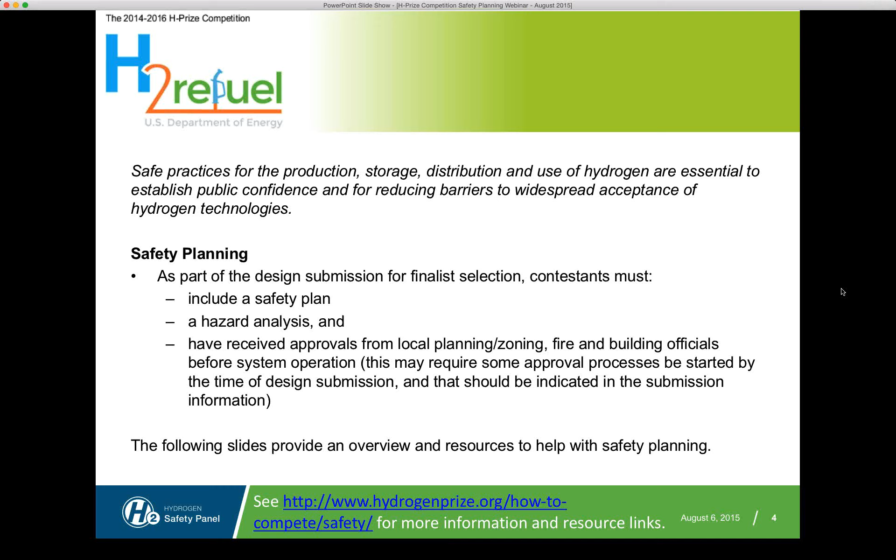PNNL has a core capability in hydrogen safety to meet the DOE Fuel Cell Technologies Office goals and needs. The capability is implemented through the resources below, of which one is the Hydrogen Safety Panel, and we'll go into a little bit more detail on that.

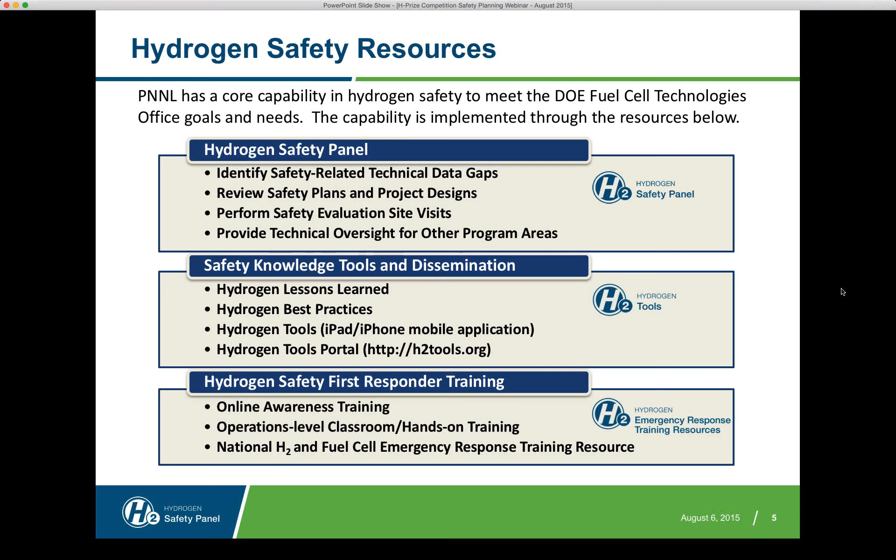Some safety knowledge tools for helping those that are in the midst of designing or deploying some of these systems, and first responder training resources. We'll talk about those at the end of the presentation.

Covering the Hydrogen Safety Panel: the panel is a team of highly experienced individuals created to address concerns about hydrogen as a safe and sustainable energy carrier. We function in a variety of areas, and our objectives are identifying and addressing safety-related technical gaps, making sure relevant issues and best practices that affect safe operation are brought to design, construction, and operation personnel, and then working with various projects and those involved in deployment activities to make sure that they understand the issues and that they make safety a priority for that activity as well.

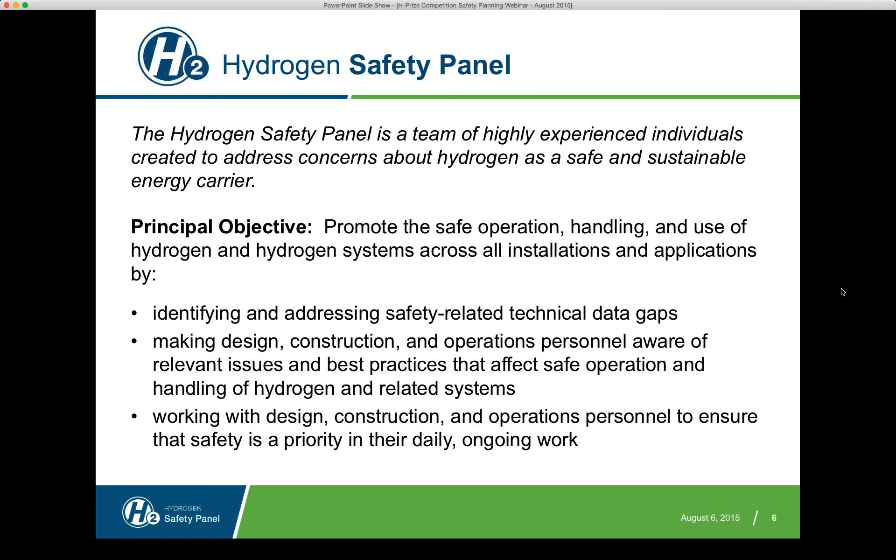The panel contributes to its objectives by participating in safety reviews. That includes safety plans as well as other design reviews, sharing safety knowledge, presenting and recognizing safety as a priority, participating in incident investigations, and really working with stakeholders and other interested parties to become more familiar with issues and safety resources and safety practices.

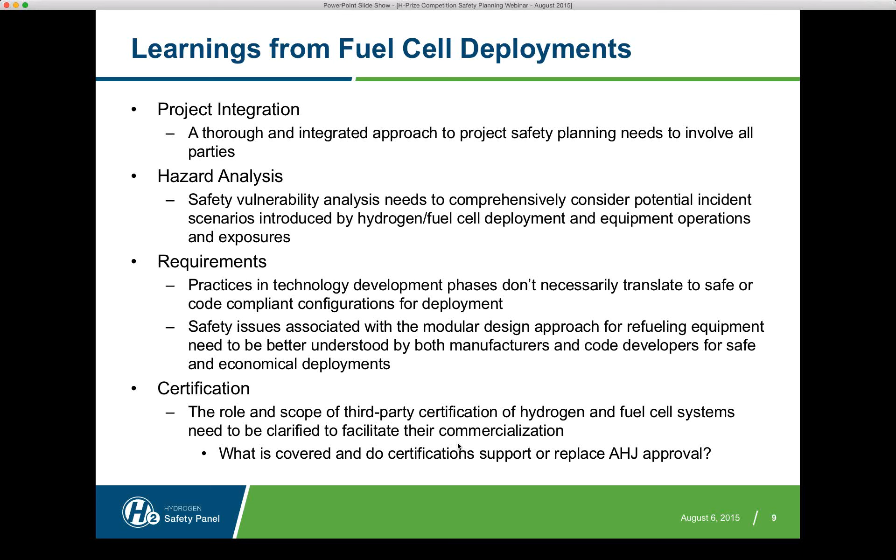So the need for safety planning, and this is really the important part we're jumping into here. I want to stress, while the competition, those providing or inputting into the competition are required to have a safety plan, it's not just about writing a document. We've seen a lot in the panel over the years, and sometimes the effort is just to get a piece of paper put out so that they can check a checkbox.

That paper is a necessary part, but the real goal here is to integrate safety planning across the entire activity, not just for what's written on paper, but the practices and the thoughts of what happens at the beginning, midpoint, endpoint, use, maintenance, all those. It's really important to consider safety. It's essential to protect people from injury, and it's also necessary to minimize damage to facilities.

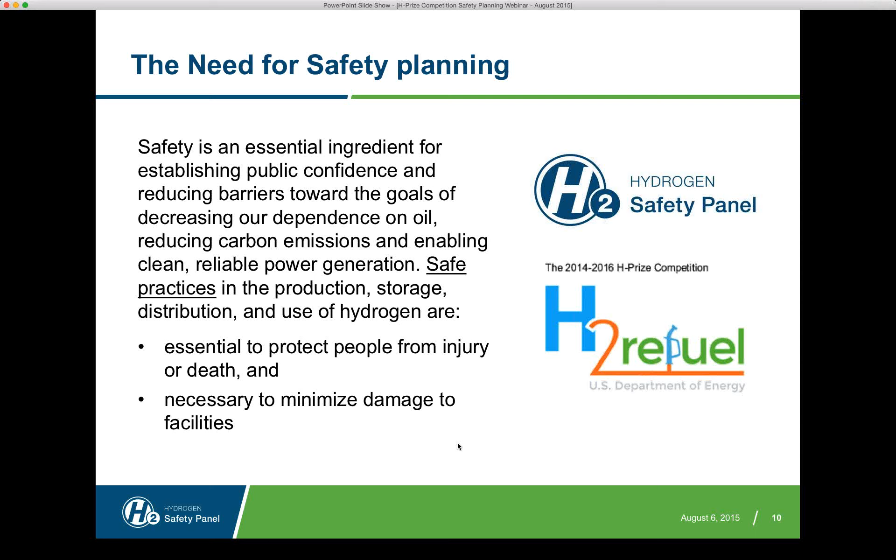Primary goals of safety planning: identify the hazards, evaluate the risks by considering likelihood and the severity consequence of an incident, and then minimize the risks associated with the project to acceptable levels. Various hazard analysis and risk assessment techniques are typically used to do that. Safety planning should be an integral part of the design and operations, not an afterthought or a final hurdle to be overcome before a system can become operational.

So we put a lot of these points down as the panel, the hydrogen safety panel, will be reviewing the submittals, and we're looking to see that safety isn't just an afterthought or isn't just a checkbox, that it really is given thought and consideration for how to be implemented across.

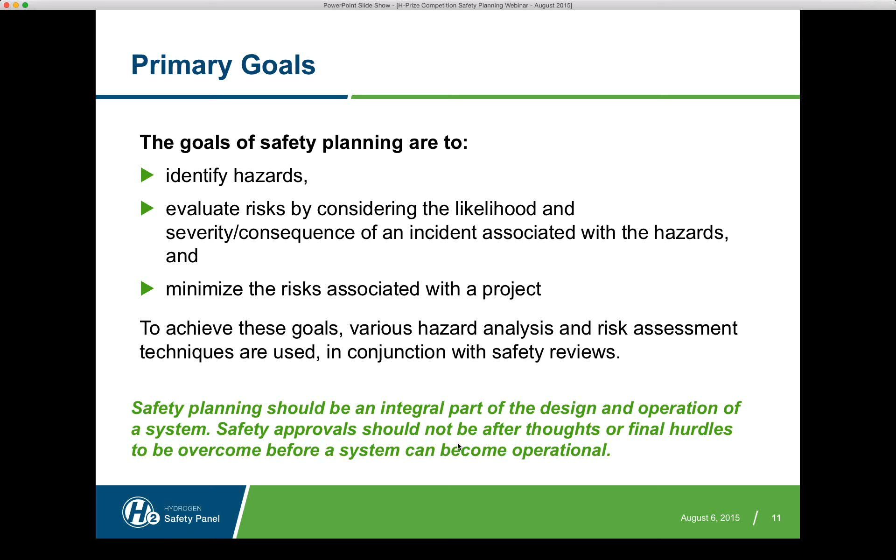Some guidance for effective safety plans. The project safety planning process is meant to help identify and avoid hydrogen-related incidents and generate a good safety plan. The key here is that a safety plan should use a graded approach based on the level of risk and complexity, and it needs to cover all the experimental and operational work, with particular emphasis on aspects involving hydrogen and hazardous materials.

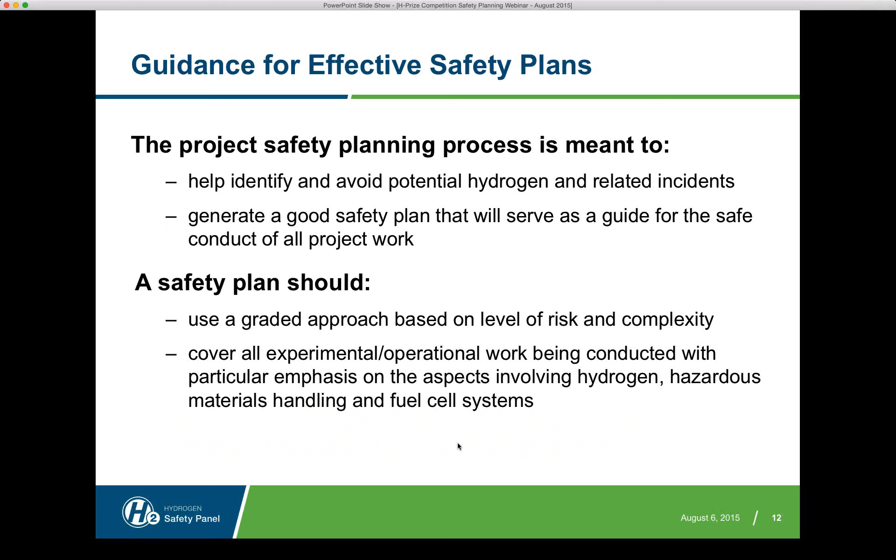The key critical point is to understand what the hazards and risks are and to mitigate those accordingly. In general, a good safety plan identifies primary failure modes and then secondary failure modes that may result from other failures. An attempt is made to identify all conceivable failures, from catastrophic failures to benign collateral failures. Identification and discussion of perceived benign failures may lead to identification of more serious potential failures. So in that hazard analysis process, whether you use HAZOP or something more like a what-if, it's really important to look at all the potential conditions, and then as you move through that process, eliminate those that are of lesser risk overall.

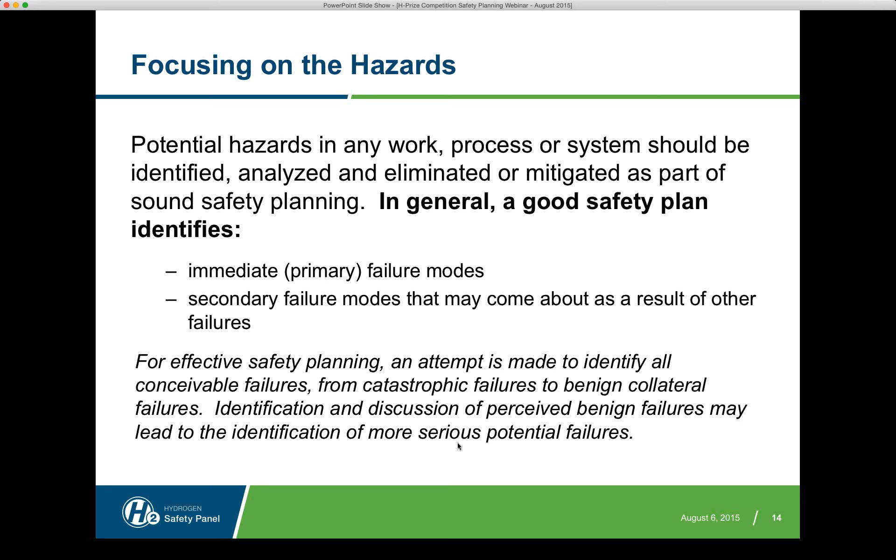A little bit of information: two questions that really need to be addressed in the ISV are what hazard associated with the project is most likely to occur, and what hazard has the greatest potential for consequence, or the worst consequence, I should say.

In providing a hazard analysis and discussion of that in the safety plan, we really want some information, like what method was used for the identification of safety vulnerabilities, who led and stewarded the process, what the significant events were, and what the safety critical equipment is, and whether vulnerabilities and risks are identified adequately, that sort of thing.

This tends to be a really big point of comments that we've made to projects, and probably one of the leading weaknesses in safety plans has been in this area, that it wasn't clear that all the hazards and risks were identified and mitigated properly. There was either inadequate discussion in the safety plan, or it seemed like the safety plan didn't address all the issues. This is an area you really need to focus on, as it's really the center of the safety plan.

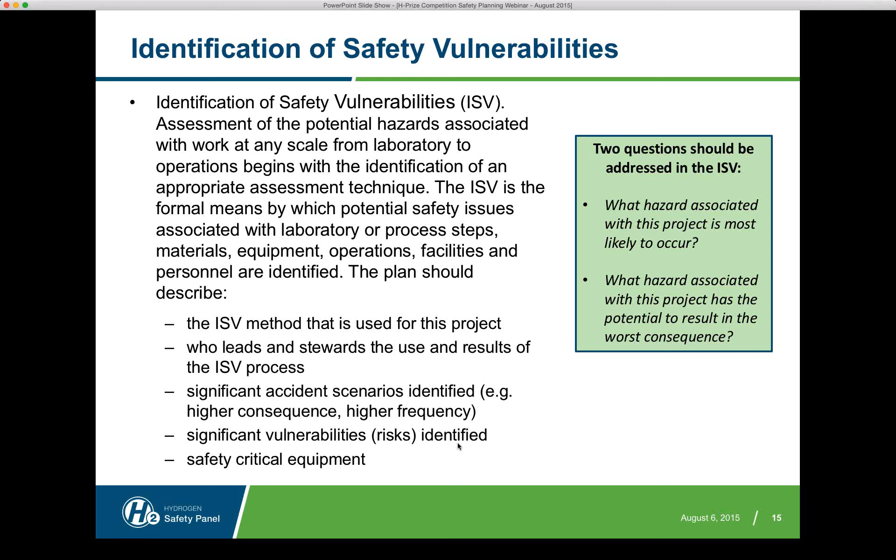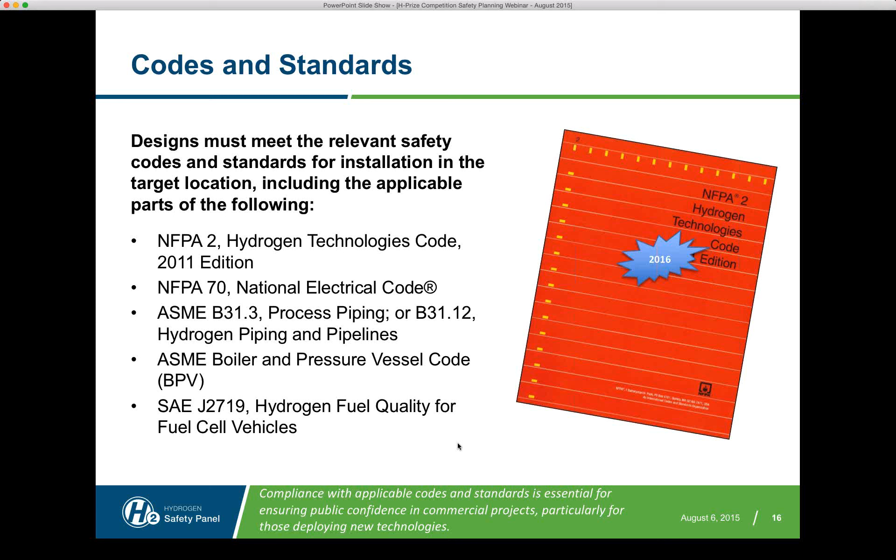Some other codes: NFPA 70, the ASME B31.3 or B31.12 would be helpful, leaning more towards 31.12 for some of this activity. The boiler and pressure vessel code, and J2719 for fuel quality. Some others that may apply depending on the type of equipment you end up providing: J2601 and J2601-2, as well as the ISO standard.

Additional codes and standards could apply depending on what you're doing and where you're doing it. The key here is that your location is going to have some impact on what codes and standards are also required locally. So some discussion in the safety plan as to what codes and standards you're following and required to follow for local requirements would be good to have. Submissions that deviate from base codes and standards need to provide detailed information on what is different and how equivalent safety is provided. The codes themselves, for the most part—NFPA 2, for example—have standard language that there are acceptable alternate means and methods if those alternate means and methods can be demonstrated as safe and are approved by the local authority having jurisdiction.

So it would be important to understand where you're deviating off the codes and the requirements, and that you have a good technical basis for that, and that you've run that technical basis back through whatever code official you have and gotten their consent on that as well.

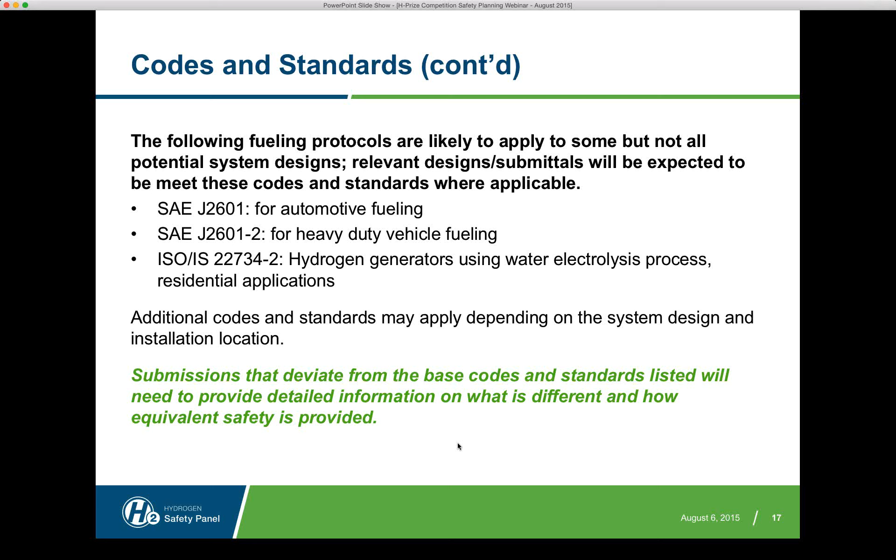So some relevant questions. Do you know who your local code official or AHJ is? And to what degree have they been involved in the design and installation of the equipment for the project? So in this case, for the submittal, it would be more the design than the installation. You may be discussing how they'll be involved in the installation as well, though. Was there any special permitting or certification that either was or is required? Has a third party review or certification of any of the components, subsystems, products, et cetera, been considered and performed?

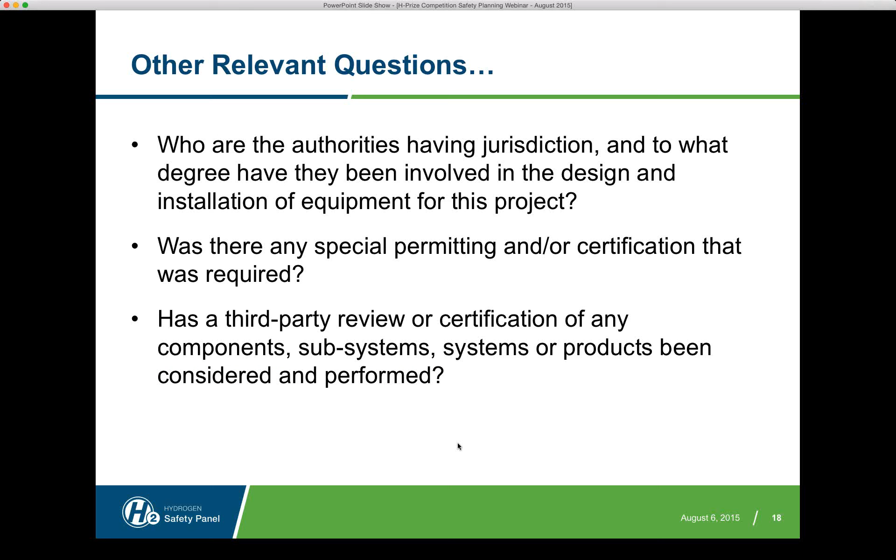Some additional documentation is required in order for the hydrogen safety panel to really understand what it is you're doing and have a good feel for the safety provided here. Things like process flow diagrams, a preliminary design or functional description for components in the systems. We already talked about the codes and standards compliance discussion. I'll take this one step further though and say compliance discussion is a little more than just saying, we'll apply this. It's really saying, what are the specific codes and how you intend to meet those, or what you intend to do where you can't meet those and that sort of thing.

Depending on what phase you are in designs and what we see for the documentation, codes and standards compliance can be a little more detailed and be beneficial for everyone involved. Most designs at a larger level go through some of this to understand, whether it be NFPA 70, some of the other standards, the boiler and pressure, the ASME standards, what are the requirements and how have we met those? Layout of the system and considering things like required separation distances, vent system considerations, electrical classification, ignition source control, ventilation requirements for enclosed spaces, that sort of thing. All that would be very beneficial and really is necessary for some of the safety planning documentation.

Well, while you're here, Nick, it might be a really good idea to talk about whether or not confidential or proprietary information can or should be included in this set of documents. Yes. Thanks, Don. That's a really great point. So if at all possible, we would rather not review anything that's confidential. Obviously, it puts a burden on the entire process to make sure there's some NDA agreements set up. If it's necessary for purpose of providing documentation, ensuring that we all understand the safety planning and that sort of thing, I would suggest that it be discussed with the Golden Office, and we work through some sort of an agreement on how to do that.

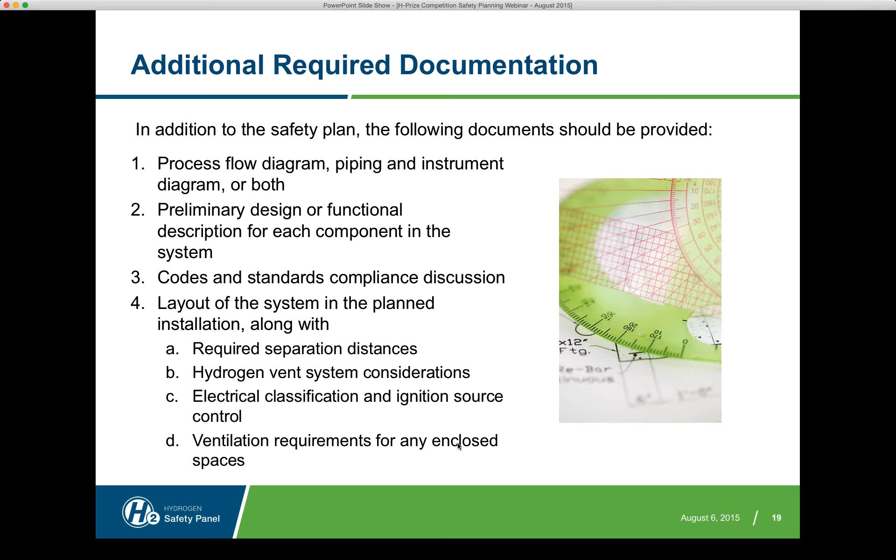Okay, I'm going to jump into safety resources now. These are resources that could be helping you with safety planning and some of the safety plan writing activities. I'll start out by talking about the Hydrogen Tools portal. This is a new website that has been brought online just this summer, and really it was meant to organize a lot of different tools into one location and make those tools much more interactive and allow much better tapping of those tools to help you in safety and safety planning. So it's a centralized location.

It's focused content. So we really considered what the user groups would be for this kind of content, and that includes things like code officials, project proponents like yourselves, first responders, research and developers, operations and maintenance folks, that sort of thing. And so the content has been tagged accordingly, and workspaces have been set up to help those specific groups navigate and communicate and do that sort of thing.

It's set up with a responsive design, so the site is very usable on the desktop all the way down to the phone. And we've really been working to establish some trusted communities. So those have all been set up. They haven't been very populated yet because we're just getting off the ground. But what it would allow is some of these user groups to ask questions, and hopefully those that have similar experience could share some answers and really help where people may not have a lot of experience.

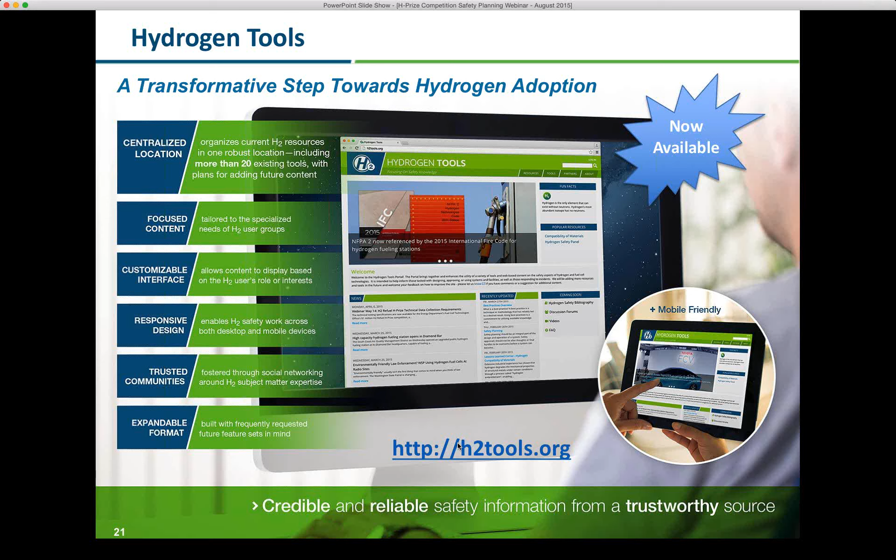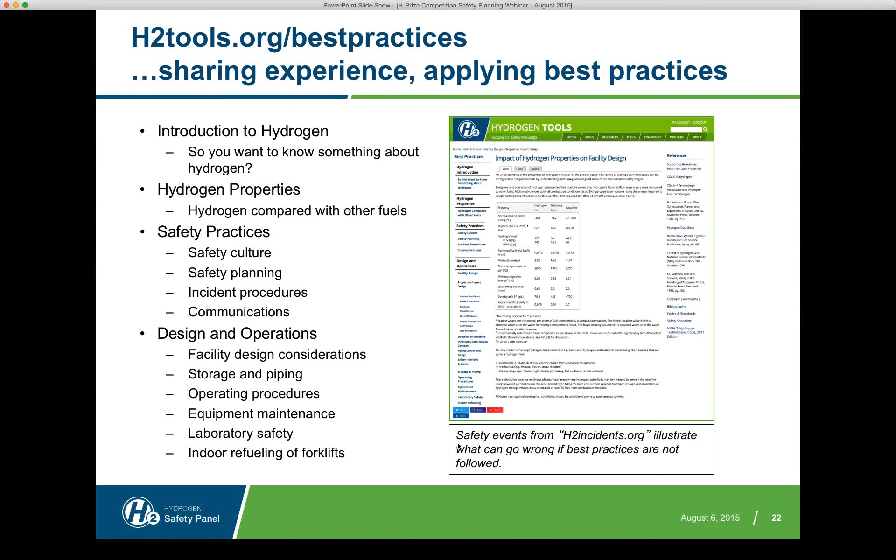So some of the information would be discussing some of the gaseous hydrogen properties. So if this is all old stuff, just bear with me for a second, but hydrogen has a flammable range of 4 to 75%. It's very light, will typically rise, 14 times lighter than air. It diffuses through material not normally considered porous. So the molecule is so small that it can really move through different types of material, and we'll talk a little bit about compatibility later on.

In a stoichiometric concentration, it requires only a very small amount of energy for ignition. 0.02 millijoules, there you see, is extremely small. Burns with a pale, almost invisible flame. There are some resources available on the portal that can show you some videos of that sort of thing and get a better feel for how it looks daytime and nighttime. And hydrogen certainly can embrittle some metals. You see in the tables on the right comparing the ignition energy versus some other more common fuels, as well as the gas to air volume ratio for flammable range.

One important point on the top bar chart there is that while hydrogen has a very large range, 4 to 75%, typically in the 4 to 6 to 4 to 8% range, it doesn't burn very well, and so it really doesn't start becoming a significant issue till you get in the 6 to 8% range and move up from there. So the lower number is actually higher in some respects. The danger point is a little higher than some of the other fuels.

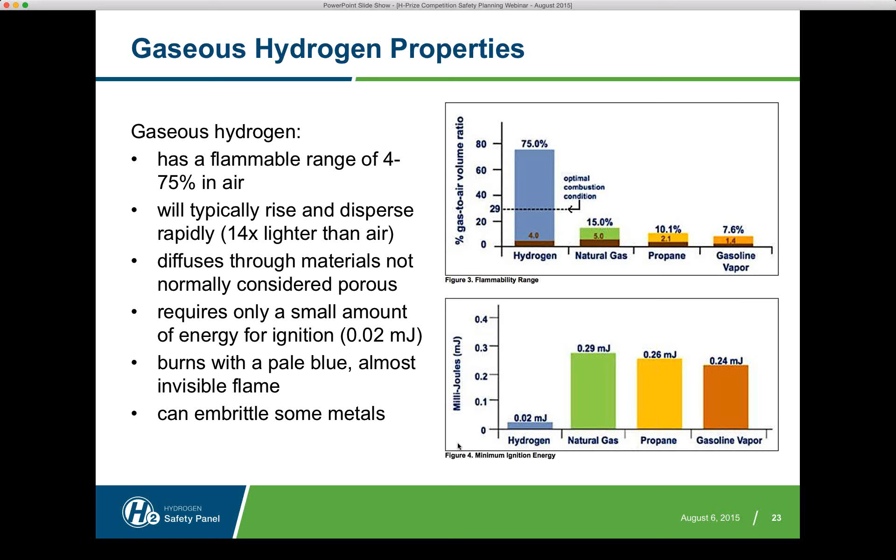Hydrogen properties, a comparison to some of the other fuels. Probably some of the best here is the odor. It's odorless, whereas natural gas you're going to smell it, and obviously you do with gasoline as well. Energy by weight is very high, but energy by volume is much less. So you can see some of the differences compared to gasoline.

For those of you new, one of the advantages of hydrogen in a vehicle is while it has to be stored at high pressure, if there is a leak or an event in which a relief device opens, the gas moves quickly away, where gasoline would typically pool and be there should an ignition source come along to cause a problem.

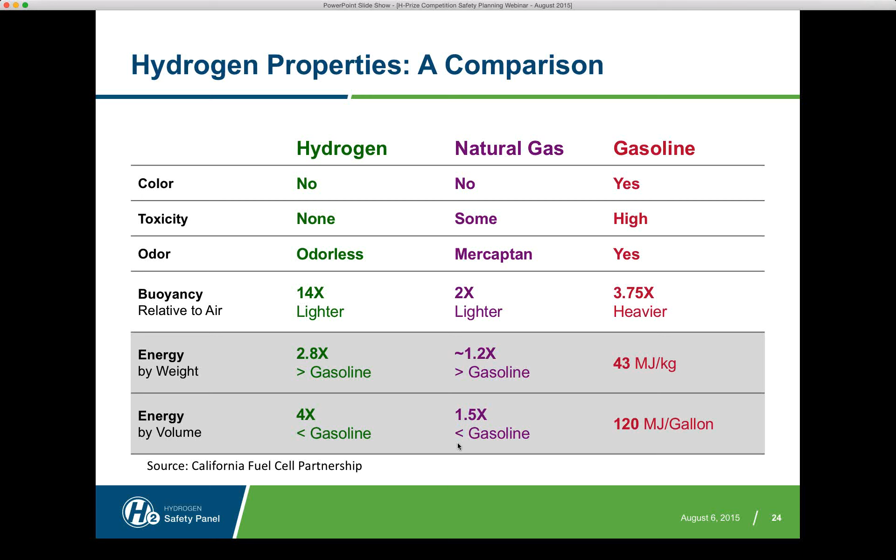So another resource that's available is the Hydrogen Tools Lessons Learned database. This has about 216 records in it. Some of the record information is described there on the left. I would point out that the information in the database is given anonymity, so what you get is information that is not attributable to any company or specific event as far as giving details that would give away where that is and when it happened.

So I really want to focus on 2 points on this lessons learned. One is that it's a great resource for understanding what has happened. Go out there, look around. You'll probably find a number of issues that could occur in a situation that you may be designing for.

The other point I want to make is that if you do have an incident during execution of the project, we would really like to know about it. You can submit it directly through the portal. Again, the information is kept anonymous, so you won't be singled out in any way. You'll provide your contact information, but that is only for us to work the lessons learned record with you to make sure we get it correct and provide the right lessons learned language for helping others in the future.

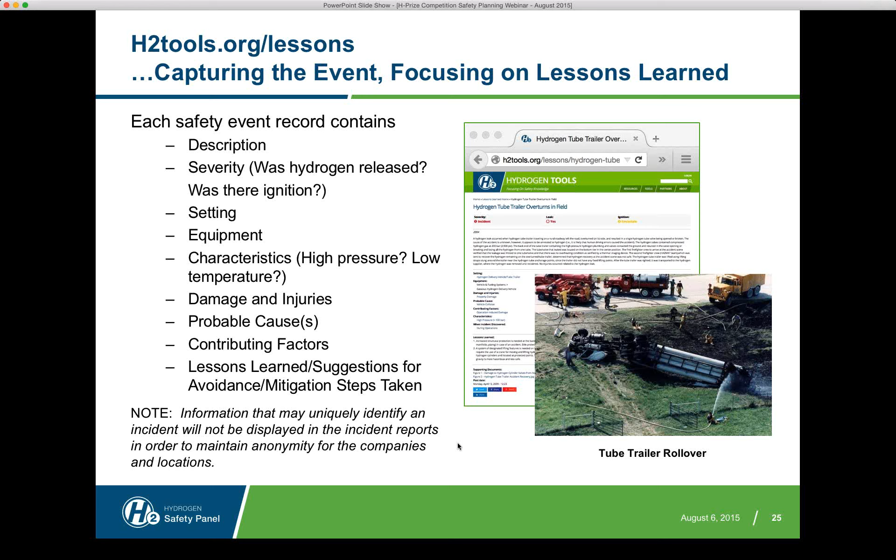So another resource available is the technical compatibility material resource. This is really looking at metals and their compatibility with hydrogen. Really recommend you understand the information here, because the materials you may use could have some compatibility issues and could result in embrittlement. I'll give a quick example.

There was an incident that occurred from a relief device that ended up using the improper material selection, and it ended up failing. There was a release of hydrogen. There was an ignition of hydrogen, and so making sure that you have the right materials that are compatible with hydrogen is really crucial for keeping safety as a primary focus.

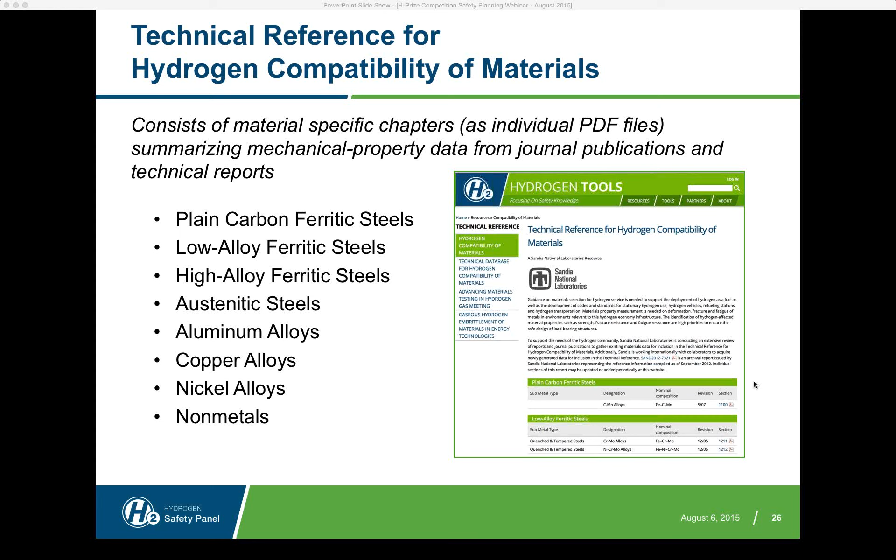So some other resources: hydrogen safety training for researchers. For those of you that might be new, this is a very good resource, giving some of the basics of hydrogen, how to handle hydrogen properly, how to deal with pressure systems, cryogenic systems, overview of emergency response considerations, that sort of thing.

It could be about a 4-hour course if you take your time going through it. Really good resource, and the link there is at the bottom if you are interested in taking it. It's also referenced off the Hydrogen Tools portal, so you can click on that to get there as well.

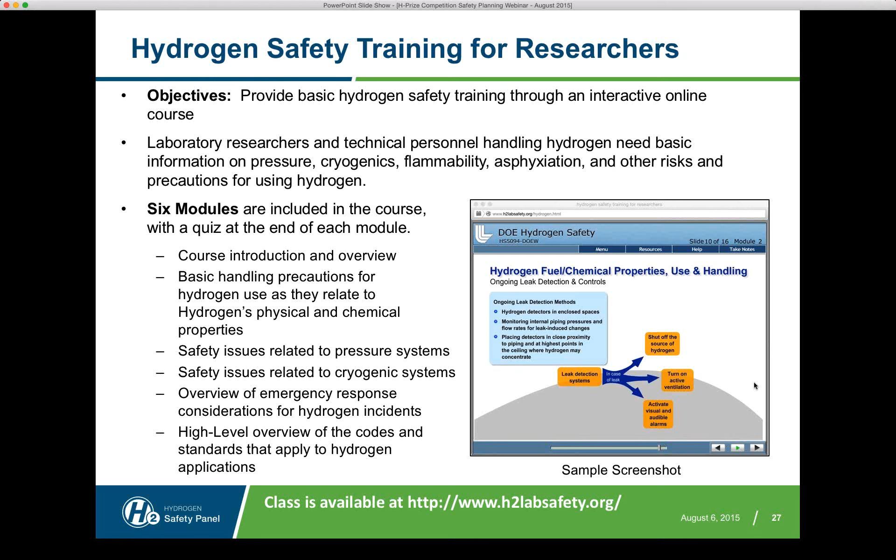I want to discuss a few things in working with first responders. For those of you that are able to get approved to move forward, it's important that first responders be brought into consideration to understand the hazards that you're working with and be prepared to respond should something occur. So I would encourage you to work with them to first let them know what's going on, what the hazards are and what quantities of materials you're using, that sort of thing. And then the other thing would be to assist them with training so that they could be prepared.

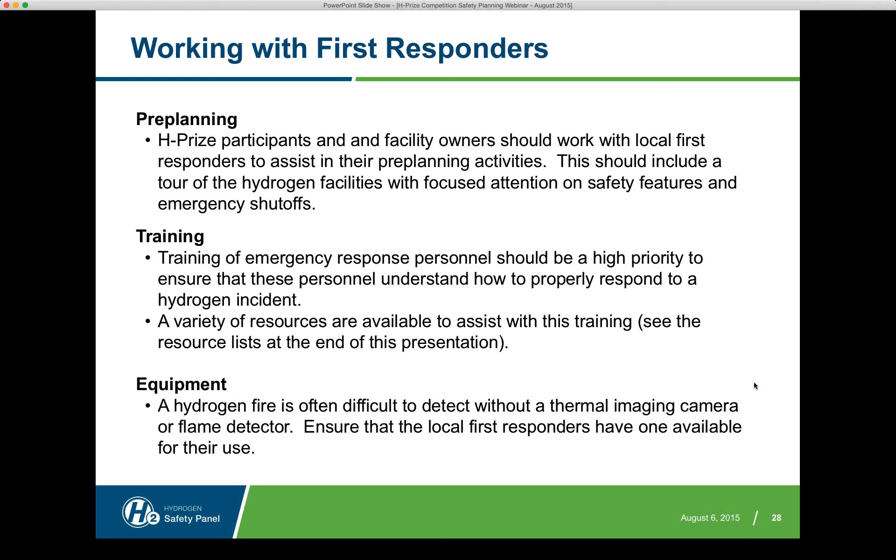And I'm going to talk about a few of the training tools that are available. It could also be beneficial to encourage them to have a thermal imaging camera available on their vehicles if they don't already. Some fire departments in larger urban areas already have those. Smaller rural departments typically don't. So that could be very helpful for the process as well. So we have a number of tools that are available for first responder training.

Nick, I'm going to just interrupt real quickly. Could you maybe move a little bit closer to your microphone? We're having some comments that it's difficult to hear. Okay, I'm sorry. Is that any better? That's better. Thank you. Okay, sorry about that.

Three of the tools that we currently have available are an online awareness level training. That's a course that a first responder could go through at their own leisure and learn about some of the hazards and some of the things that need to be looked out for. A classroom and hands-on operations level training, that probably won't come into play for this activity. We occasionally provide that. The last set we had were in Washington State. We're currently in discussion about having some of those trainings in the Northeast next year.

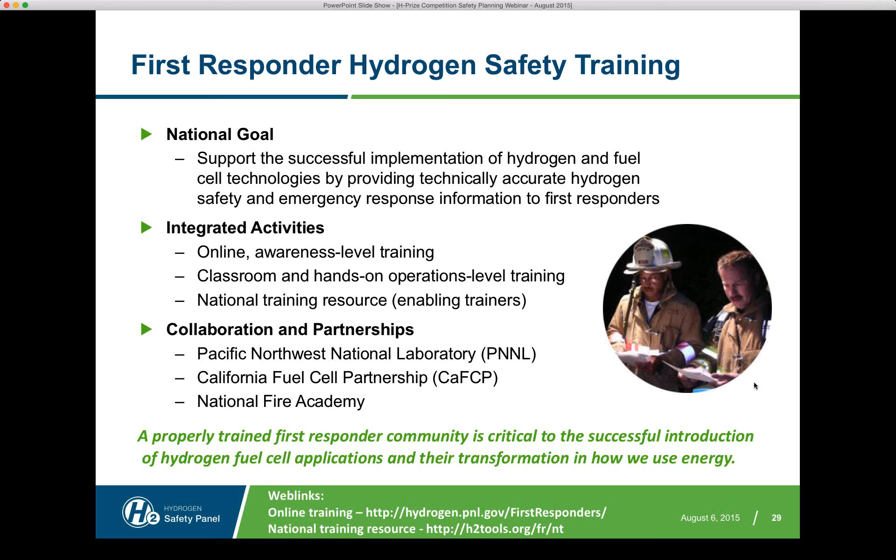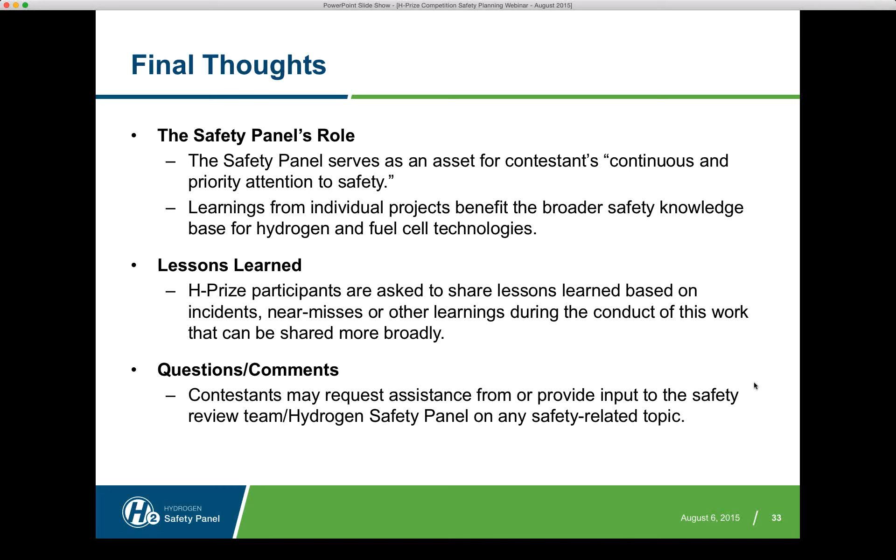And then contestants may request assistance from or provide input to the safety review team and the safety panel on any safety-related topic. So I do have my contact information at the end. If you want to get a hold of the panel, you can do that through me. And that'll bring us around to questions and answers. So at this point, I'll open it up, and I think Don and I will try to answer some of those questions to the best of our ability.

All right. Thank you very much, Nick. Very nice presentation. We do have some questions that have come in during your talk, so I'll just read you the first one. It would be terrific if you would speak to past lessons learned, such as the AC Transit hydrogen issue in Emeryville, California.

So I don't want to give accusation, or I don't want to push and point at anybody at this point, but certainly there are lessons learned from the AC Transit. It was a material compatibility incident, as well as managing first response, and there's actually a report out on the internet that could be downloaded to get more information on that.

I just would refer back to the incidents database, the lessons learned database, because the focus of that database really is lessons learned. What did we learn? And it can be searched down to some very good detail of what you're trying to find, what type of incident it is, either by title or by location and that sort of thing. And we're available if there's some discussion that needs to happen on some other specific incidents or learnings or how those could be applied. We'd certainly be willing to help you out with that as well. Good response.